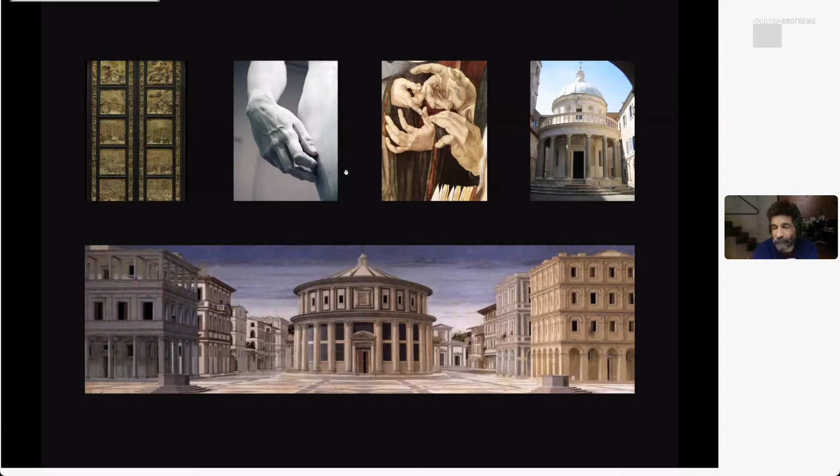His book remained on bookshelves, really, as the #1 book on art history until 200 years later with Johann Winckelmann, who published the history of art and architecture of the ancient world in German. It's a bestseller because he's the first person.

This is the Enlightenment period, so he's less anecdotal than Vasari. He's actually mapping. He becomes a proto-archaeologist, as it were, as well as art historian. So he properly maps what he's digging up, reconstructs these, and puts them in a timeline sequence: Egyptian, Mesopotamian, Greek, Roman, etc. The past, the ancient past.

But he's not an architect or sculptor or painter. So his initial book, his first book, is well received, becomes a bestseller, replaces Vasari on the bookshelves of academic institutions as well as personal libraries.

He follows that up with his opinions on the works of the ancients, and in his opinion, Greek is best of all because he conflates the short period of Greek democracy with its architecture, with its sculpture and its architecture.

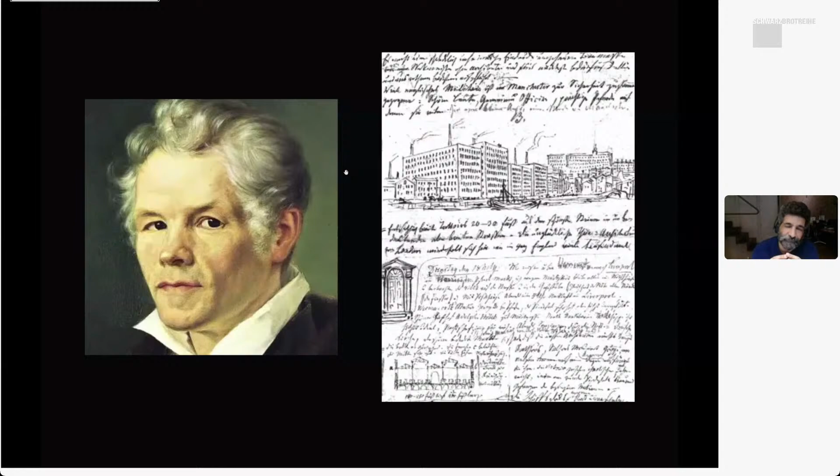Bötticher with others, so it's not just in Germany, actually, it's in France as well, the École Polytechnique, decide that actually the origins of all architecture, the etymology of all architecture, is in what Bötticher defines as tectonic. The tectonic is how architecture is put together.

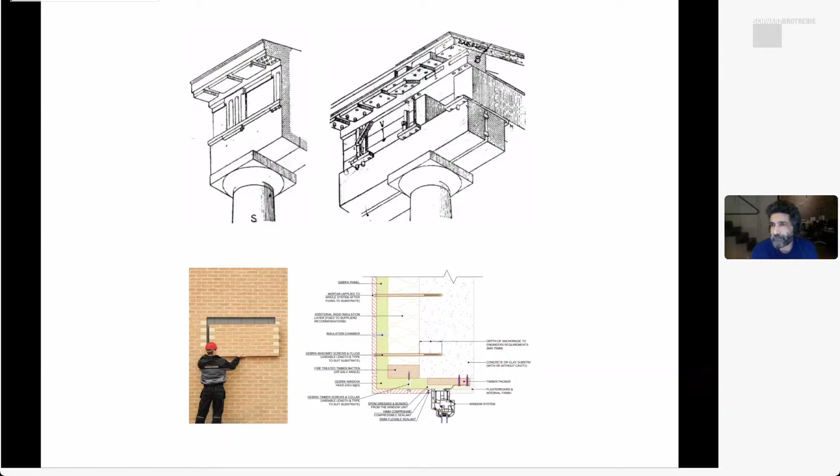The pieces that make architecture, whether it's stone or timber columns with beams, how they're fixed together. All these elements are the tectonics of architecture. One of Bötticher's students, or rather he picks up the theory, is Gottfried Semper.

And interestingly enough, he's exiled in London for a while, and is actually spending his time at the British Museum, looking at the new exhibits that are coming in. And while he's there, he sees these Assyrian friezes that come into the British Museum. And in the stone friezes are representations of the throne and the stools of the Assyrian monarchies.

And he has the insight, as well as tectonics, how things are made, the architecture and even the applied arts are made. It occurs to him that the reason these motifs eventually exist, what we call ornamentation, decoration, that Schinkel and others hadn't understood the origins of, is what he terms the binding, joining and completion of architecture.

So the binding and joining is the tectonics, how you put things together. The completion is eventually when you settle culturally or as a community on how you make those things efficiently. Maybe they become abstracted and decorative and emblematic of a particular culture. So that's the completion of an architecture, as it were.

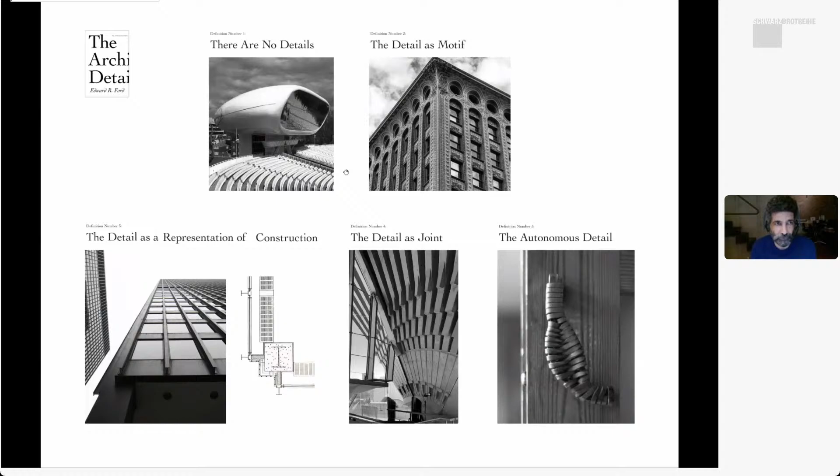Right, let's go into stone. So our first foray into stone is a small house. It's not even a new house, it's a conversion. But what we found when we were there were elements of the original house which were made of travertine and brass and cherry, and a staircase that had been destroyed and rebuilt, and we wanted to reinstate it, but in the original stone, yet not copy what might have been there in the past, but let's say rebuild it.

Now, there's a type of staircase you all must have seen in older buildings, which is stone, and it just spirals itself down the stairwell. It doesn't seem to have any steel or concrete in it. It's just stone, seemingly cantilevered out the wall. It's not actually cantilevered. It's actually one stone resting on the other, taking its force all the way down and keyed into the wall to stop it twisting. That method was lost in this country, at least, until the 1980s.

So I'd read about it when I was a student, and so we were keen to see whether we could do this without any other materials, without steel or concrete. But no English stonemason could do it. So when we were asking who could help us, the English stonemasons said, well, the French ones are still trained to build like this in France. If you want to know, I can explain later why that is.

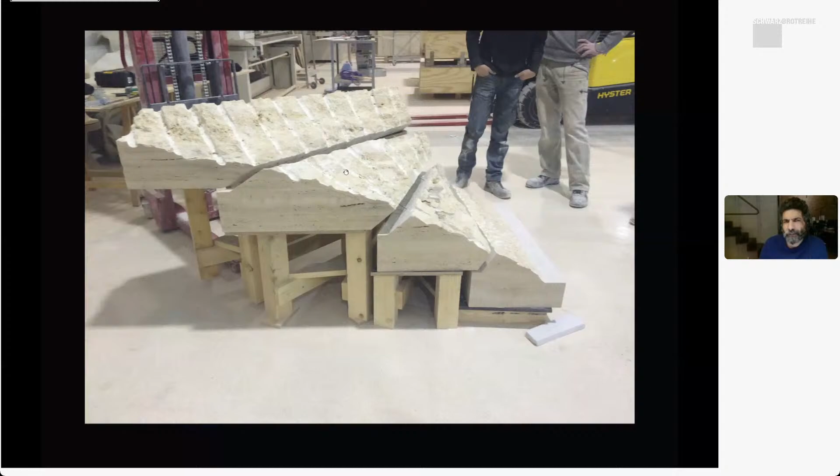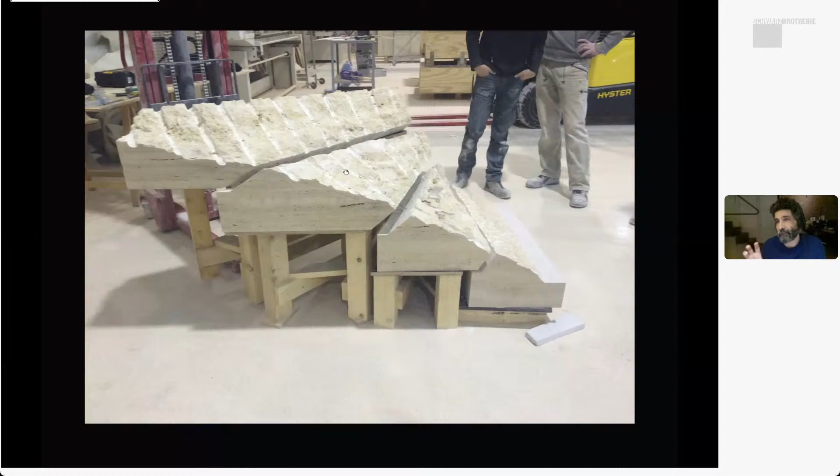The only thing we might have added to that process was making a three-dimensional model and realizing that we could send that model to their cutting machinery, which meant that actually they didn't lose 50% of the stone, because often you lose 50% of the stone while you're cutting out each tread. We worked out a method of using the same stone, larger block, cutting it in half, as it were, but with a twisting drill method that would then allow the other stone to be used on another flight.

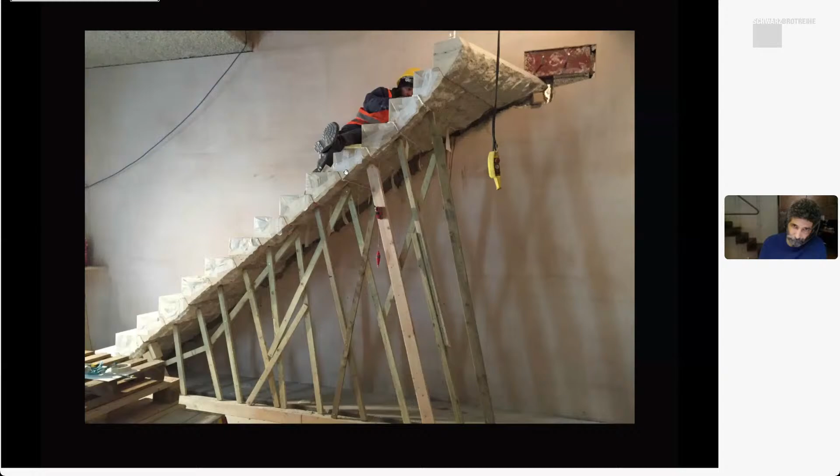But otherwise, there's just lessons we learned from methods that have existed for, dare I say, thousands of years. So that's it being erected on temporary timber props and just gently keyed in the wall to stop it twisting out.

While we were there, we saw these large blocks come into the workshop. And if you turn that block through 90 degrees, it becomes a column or a beam. And we were scratching our heads wondering, well, why is nobody using real stone as opposed to all these buildings that are cut with veneers and then stuck on as cladding?

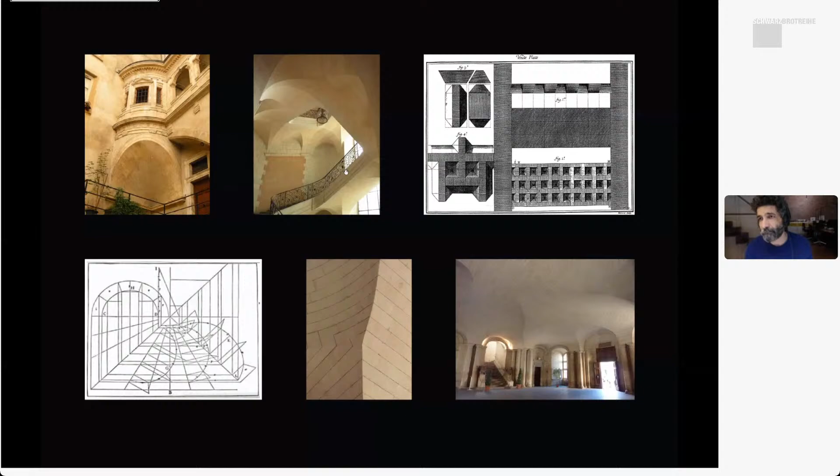And then within a short period of time, within 100 years, that bottom right is somebody building that. So that still exists in France today. And of course, this is how we build today. If we want to put up a stone building, we have either concrete or steel frame.

If it's steel, you have to fireproof it, waterproof it, then put your insulation and vapor barrier, puncture through all that with clamps, seal the punctures, and then those clamps have to be bonded to a piece of stone veneer, which all seems quite a lot of hard work. Is it more efficient? Is it cheaper? Is it better, does it have a lower embodied carbon?

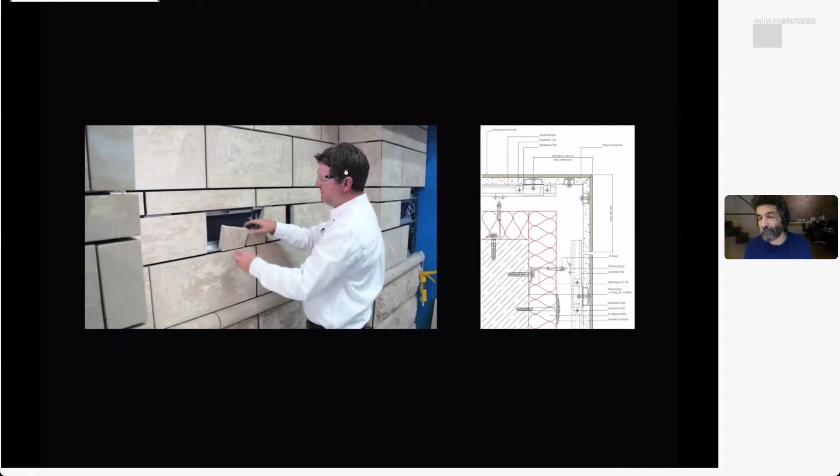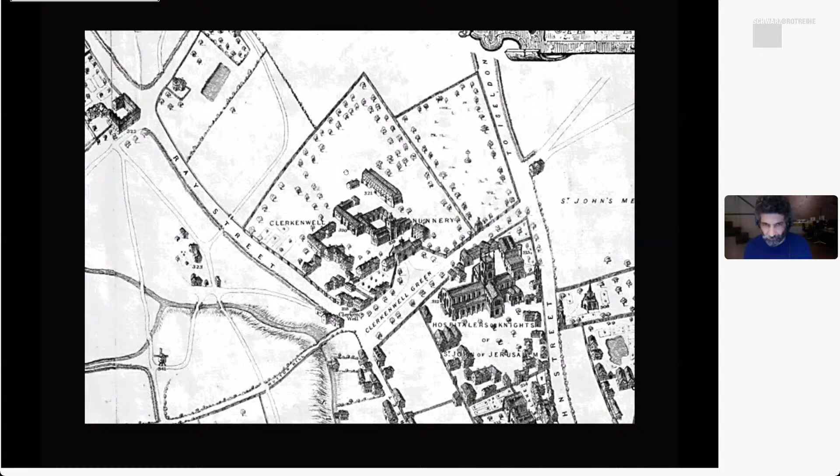These are questions we asked when we had our first project, which is on Clerkenwell Close. Clerkenwell Close is outside the city walls. It's medieval, its origins having been first built on by the invading Normans, and has a long history of radicalism because it's outside the city walls, and printing used to go on there, pamphleteering. So just like your early printing was radical, same here, specifically this area became the center of publishing.

Eventually, William Morris ran the 20th Century Press there. Karl Marx wrote for the 20th Century Press. Lenin actually used its printing presses to do his Russian language paper. And this site is basically next to ours. We're neighboring buildings.

And that radicalism pretty much stayed from the Middle Ages until the mid-20th century, by which time the population of this area decreased by about 50%, but also architecture in general, its radicalism had left us. We'd become a bit more conservative, and nowadays Clerkenwell is typified by those brick and stone veneer type buildings that you saw earlier.

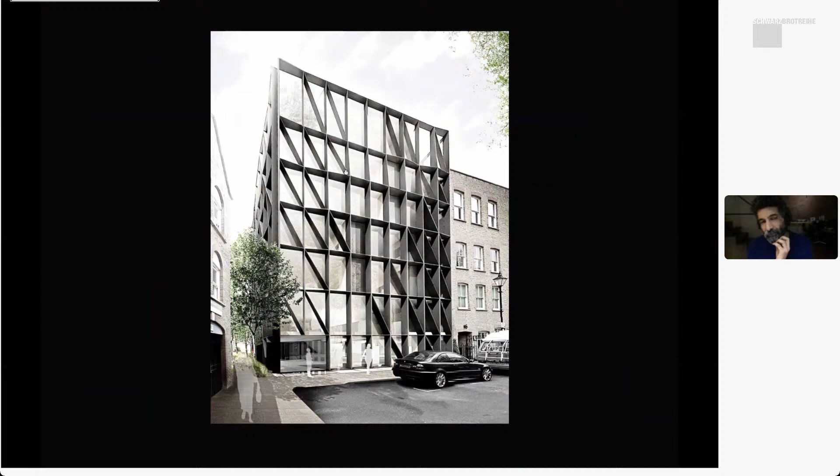Our first attempt was to more allude to the half timber structures, and we used a bit of AI software, self-learning software, where we plugged in the amount of metal for a steel frame building, the amount of metal in conventional curtain walling, and asked whether it could reduce the metal involved, and it reduced it by about 30% by making it into an exoskeleton, thin steel plate that was then given a fireproofing.

If you look carefully, it's slightly modulated, undulating in its form, because each one of those is deeper or shallower depending on the load path of the stress of the structure. It went down very well with the planning, but one particular conservation officer didn't like it. He said, please use stone. We were scratching our heads thinking, well, we've got no prejudices against other materials.

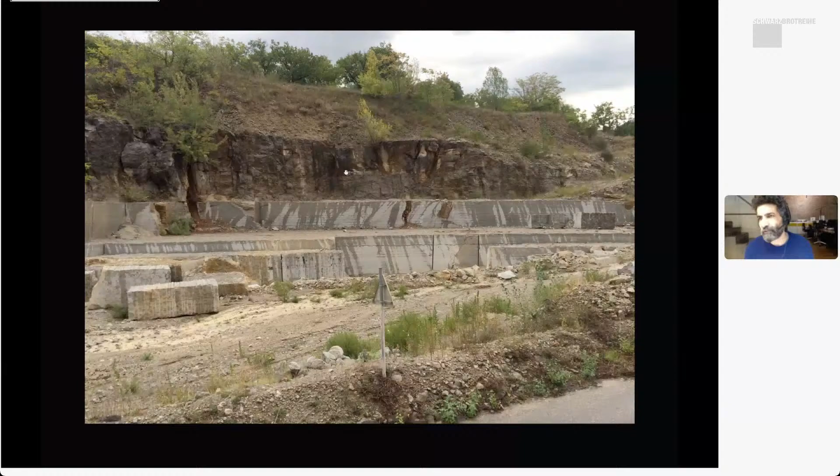And we wanted to use stone, but our quantity surveyor, the cost consultant, said, well, it must be really expensive. That's possibly why no one's ever used it for 100 years. The structural engineer told us, well, he'd never been educated. No structural engineer is educated in using stone in this country. And we only understood it as this veneer.

So again, we returned to those French stonemasons who said this is absurd. In France we used to call it austerity construction because it used to be cheaper than steel or concrete. Why don't you come visit us in France, visit some quarries?

So we initially went to some English quarries where they said we've stopped cutting dimension stone, that is stone for structure, about 3 generations ago. We don't have the skills, we don't have the tools, and we couldn't tell you how strong. Couldn't give you a certificate for the strength of the stone either. Go to France, follow the limestone bed under the channel. Remember, stone has no nationality.

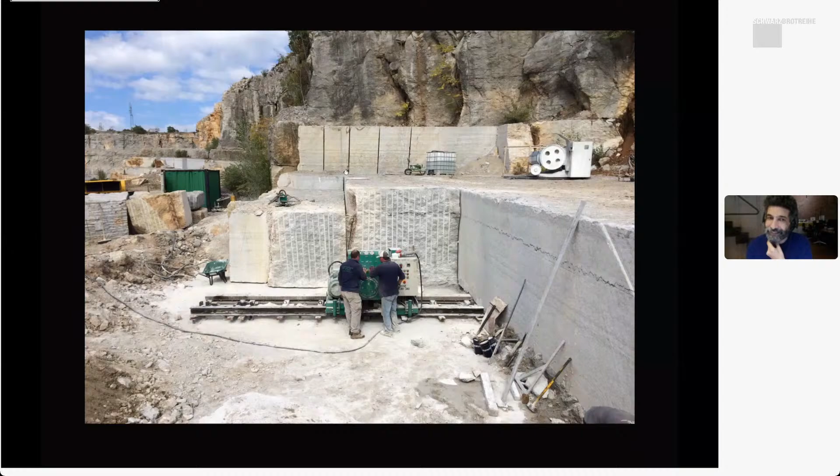So off we went to France, and we found these quarries can now cut out stone very inexpensively because they all use industrial diamonds in their saws and only need 1 or 2 people in the quarry as opposed to an army of men hammering away all day to get 1 block out. And occasionally, if a block splits badly, you're still using the old traditional tools.

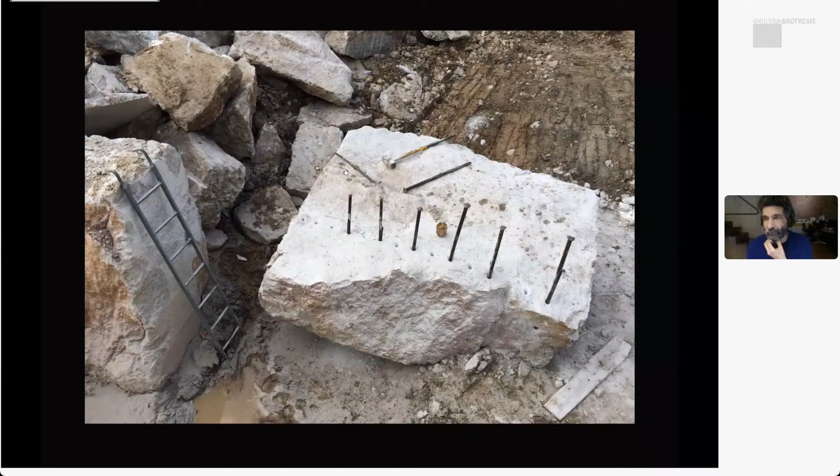And we found actually there's three types of finish that come out, minimal finishes that come out if you're still using those methods, which are from right to left, saw cutting, a sedimentary finish, a split, or drill split. And then occasionally you'll see a quartz pocket or an old fossil pop out too.

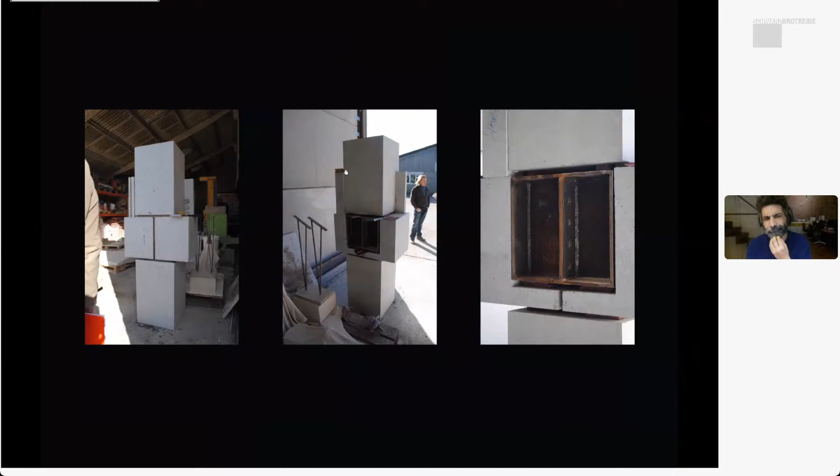This is us testing how the stone might work with a metal boss that supports the floor plate at the back of it. And there you can see our structure going up on temporary propping before the stone comes in to support the floor plates, and then the propping disappears.

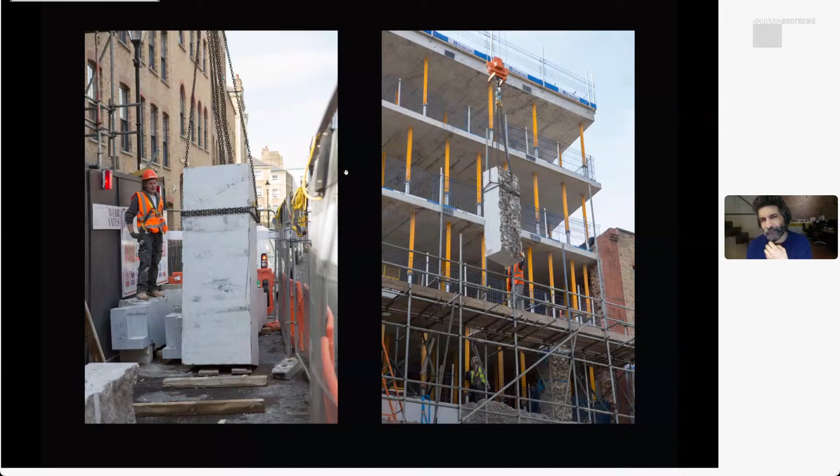So you can see there at ground level we have 2 neighbors we're using for support, but then we start with this exoskeleton on 2 sides until we get 2 floors above, and the exoskeleton wraps all the way around.

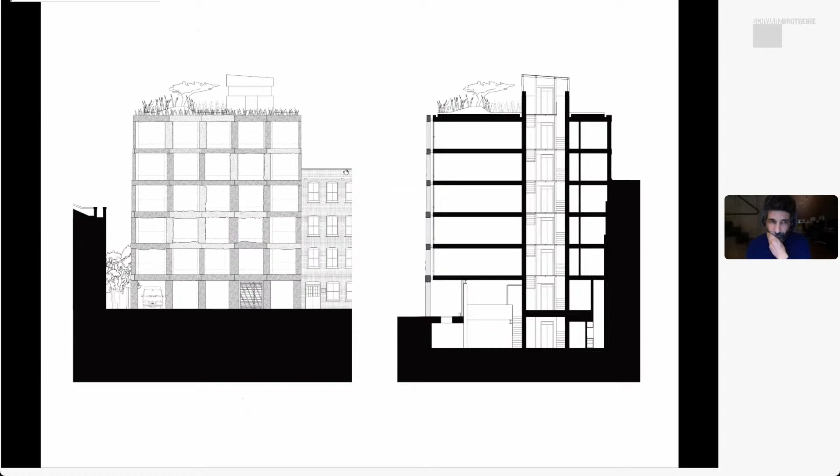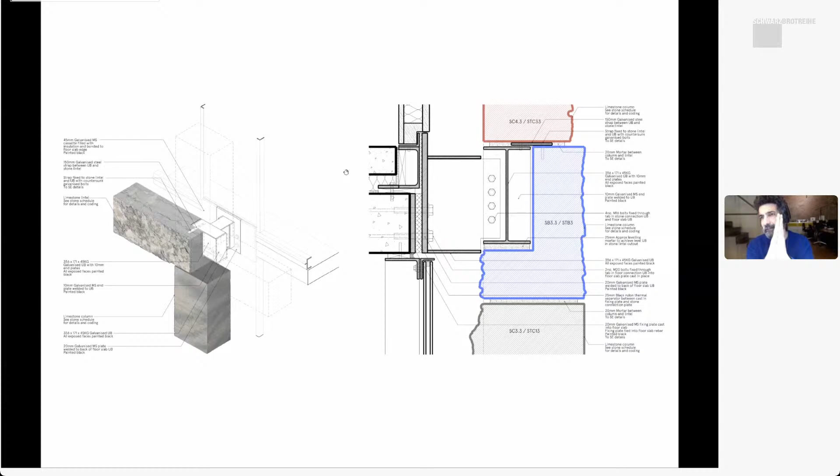There's our detail. So on the right hand side you can see that's the exoskeleton sitting there with a metal boss grouted into the back of it. So it's all gravity. There's no pins or anything holding it together. And then the metal boss is tied into the floor plate with a nylon bar, a nylon plate that creates the thermal break between outside and inside.

You'll see there some stones are bigger than others, and that's again using exactly the same software as we used before, telling us that because of the load path, one stone has to be bigger or smaller. And if you look carefully on the edges, the very edges, there's almost no load, so the stones get very thin there.

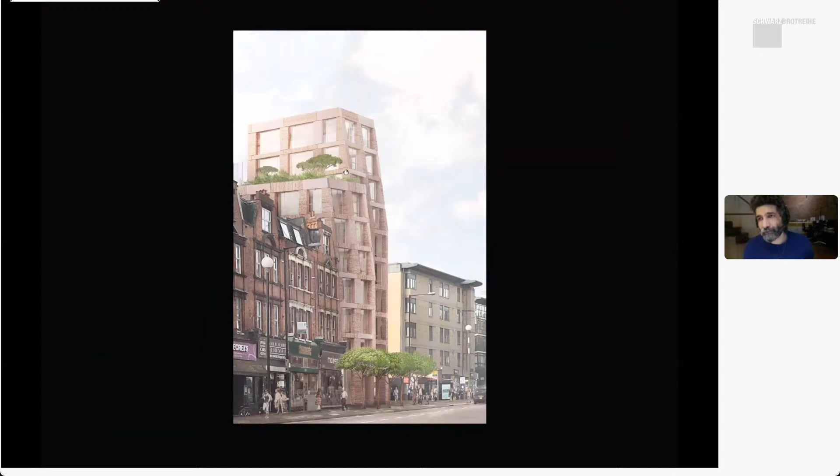And on the top you have what's called a blue and green roof combination to avoid pumping water up and down or putting the rainfall into the sewage system. We've taken that lesson to a building that's now twice the height on Finchley Road. And there we had a moment where we realized after this structure, Clerkenwell, went up, we could have made all the floor plates in cross-laminated timber.

So here, the plan is that they're all cross-laminated timber, and the exoskeleton there, instead of limestone, is basalt, because basalt performs better in a fire on taller buildings, where the fire performance has to be 2 hours instead of 1 hour. And the basalt can be about half the size, volume of limestone, perform better in that way, which basically means less extraction, less transport, less time on site. So again, lowering not just the cost, but obviously the embodied carbon.

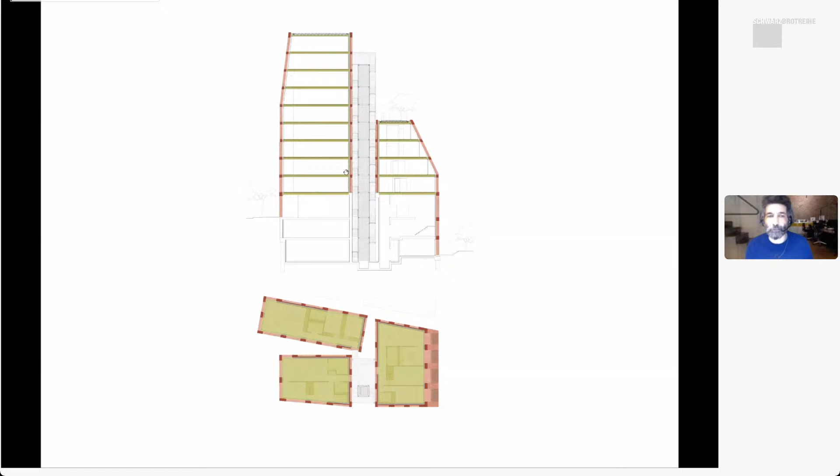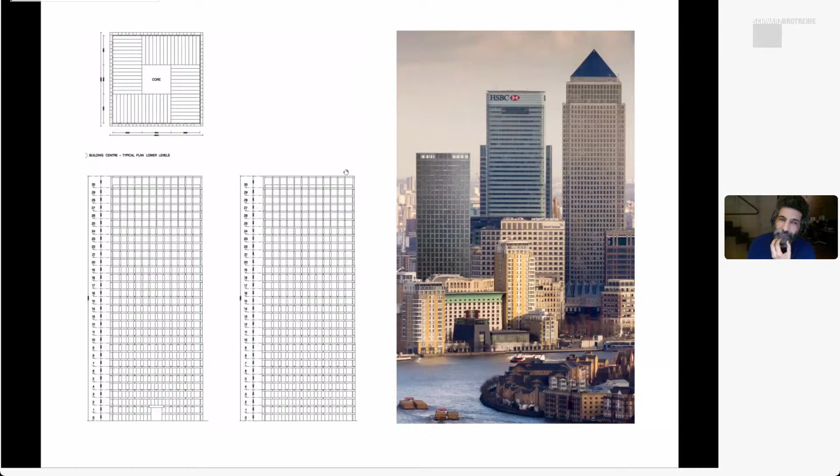And that's because stone has no embodied carbon. It's sitting there. It was made for us 250 million, 600 million, whatever it is, years ago. Maybe it came out of the volcano 10 years ago. There is no embodied carbon involved in it. The carbon involved is in the energy you spend cutting it, transporting it, erecting it on site.

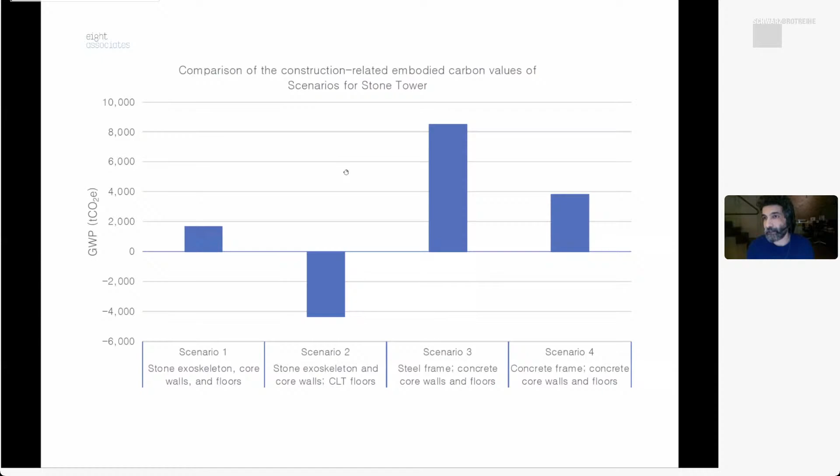So what do you do? You material passport your timber, and that way you remain carbon negative, and that's the key to all of you as you go forward in your careers, really. What we also found was a timber and stone version of that tower is cheaper. Not a lot cheaper, it's about 10% cheaper, but for most developers like Canary Wharf and Derwent, 10% in the construction cost is significant enough.

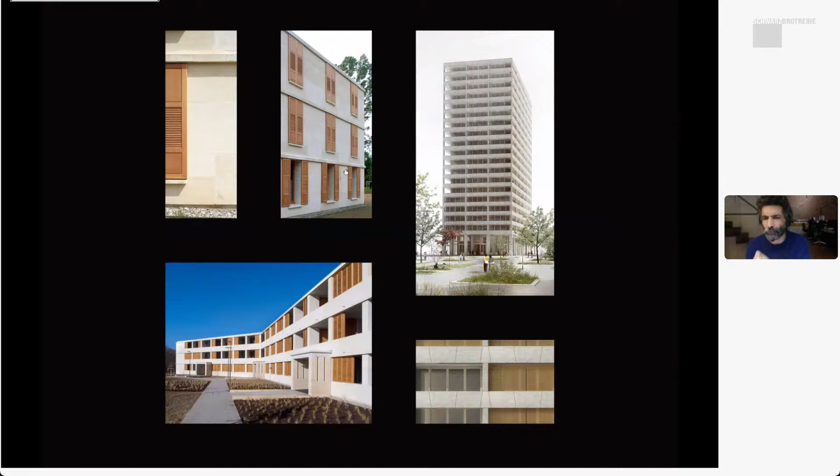I'm almost done, but I'll give you examples of people who have built in stone in the past and currently. So where are we? Perraudin, Pouillon, and Perret. So this is Perraudin in France, who is already building low rise as well as mid rise, and then he won a competition, I think in Switzerland, for a taller building, all again in stone.

This is Pouillon, who in the 1950s was building all in stone, because at that time in France, this is what they call austerity construction, because it was cheaper to build in stone than it was in steel or concrete. And if you look carefully, the way he worked it out was if you cut stone so it's manhandleable, it can be picked up, dropped into place, as opposed to all of it having to have expensive cranes at the time, it should be cheaper than steel or concrete, which it was. So he persistently won his tenders in France.

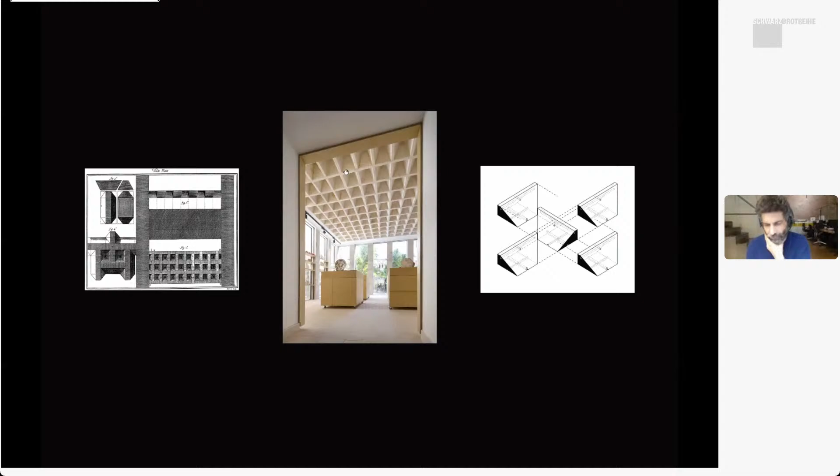So if you remember our 17th century French engineer, here is a pair of architects, AAU Anastas architecture in Palestine, actually, who've created this 17th century flat soffit of reciprocally loaded stones only a couple of years ago.

Of course, today our software can do anything. I mean, in terms of its shapes, the shapes we can create, and even the cutting tools can follow pretty much what the software is telling it to do. So again, there's minimal wastage, and arguably, you know, some buildings deserve more attention and energy spent on them than others, but there is no limit today really to it.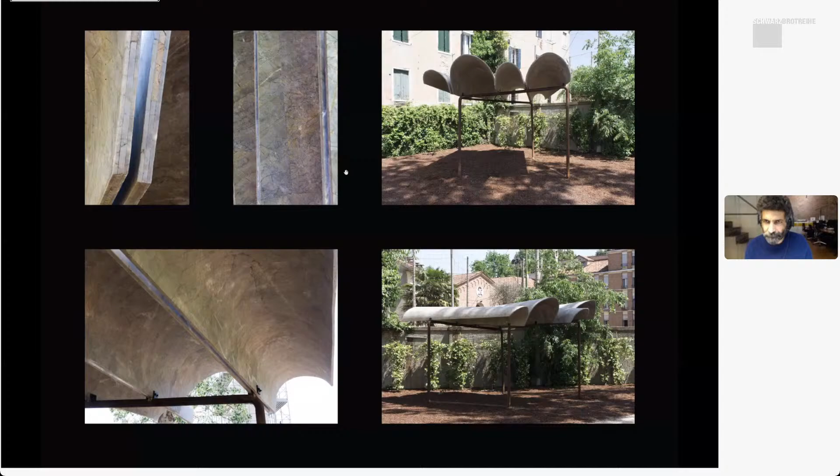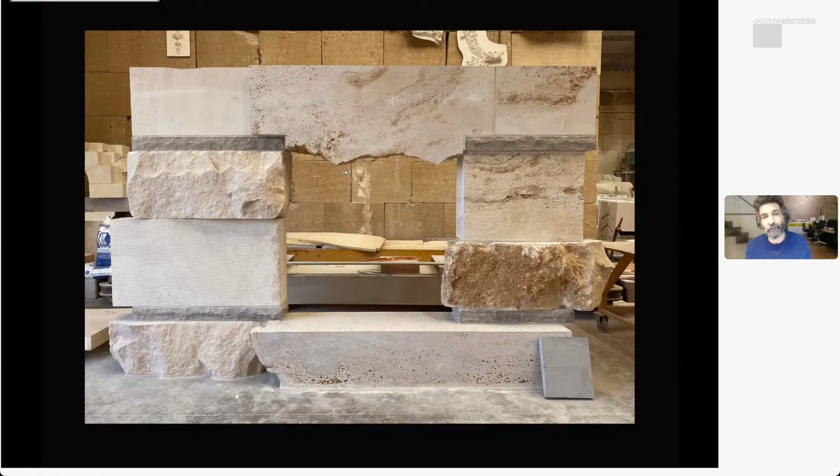Our experiments go on. So there's a house we've been working on where it's simply just stacking stones. As you find them in the quarry, reduce the amount of energy and cutting you need, stack them up and see how tall you can make that. On the left-hand side, you can see there's, I can't remember how long that is, maybe 15 meters.

So you've seen precast concrete planks that then quickly sit on a frame to create the floor plate, on top of which you have to put a concrete screed to fill in all the gaps and create a level surface. Here we're experimenting with effectively the equivalent of a precast concrete plank, but a post-tension stone plank, which, because it's cut, needs no concrete on top.

No, it's already level. And you combine the cost saving of doing that, plus the fact that it's nice stone to look at, so you don't need any suspended ceilings or other things to hide the crinkly tin or precast concrete plank, then that ends up being cheaper than doing the other method, the concrete method or the crinkly tin method with pouring concrete on top.

There are some other experiments of lintels and other post-tensioned soffits, and then even reducing the amount of time on site by grouting at the back of some of those stones, bonding them together with this basalt grout, so you can transport them and lift them into place. So then that grout is not structural, it's there just to keep it together while you're transporting and lifting it into place. The stone is structural of its own, as it were, in its own dimensions.

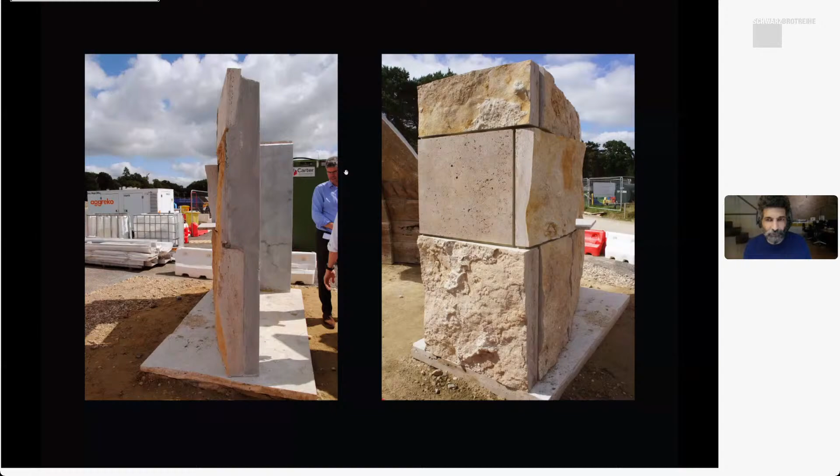Oops. Yeah, that's us again experimenting with more of that waste stone. I think that might be our conclusion. Yes. That's the end.

Wow, thank you. You're welcome. It was such a beautiful presentation. I really loved everything about it. The start, the aesthetic of the buildings, the aesthetic of the stones, of the different haptics, with the different methods to cut the stone, and then also the further research outlook in it.

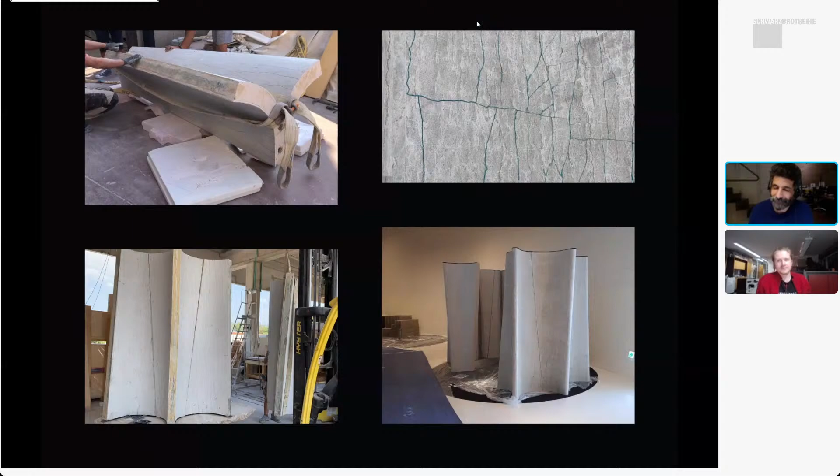Your engineer will tell you it needs to be of a certain structural strength. Very quickly on a database, you can find the quarries that are supplying that structural strength, and then you reduce the spectrum of quarries to the color of stone you want, the type of stone you want. And slowly but surely, you might go and visit 3 or 4 quarries for the final appearance or something else. Cost, what's cheaper. How early do you bring the stone quarry into the design process? Hopefully that's answered the question on how you find the structural quality of the stone.

In terms of sizing it, our engineer, because he hadn't built with stone before, said, I'm going to pretend it's unreinforced concrete. In other words, it's got the same structural properties of unreinforced concrete. If it splits, it breaks. So I will therefore size it. Unreinforced concrete, I can't remember exactly, it's something like 20% bigger or more than reinforced concrete. And reinforced concrete is already 20%, 30% bigger than a piece of steel, because as long as the steel's come out of a mill at a certain quality, we know its failure rate will be quite small.

How early do we involve quarries and stonemasons? Out of habit, we involve all specialists now very, very early. And this is not just because we want to know the type of stone, what it looks like, whether it can cope, but also the cost of it. Because what you guys will learn when you go out into industry is, we're in a habit as architects of having all the control taken from us. Now we're just left to make lovely drawings, and then somebody else does the costing, somebody else does the structural engineering and all the rest of it.

And then every time the cost consultant says we're now ready to go out to tender to the industry and find out whether this is on budget, because I think it is on budget. I don't know how many buildings you've been involved with, but I can guarantee you there's no building that comes in on budget. They all come in over budget, and everyone's scratching their head. Oh my God, what have we done? How do we save this building and save our client? Well, in this country, we call it value engineering.